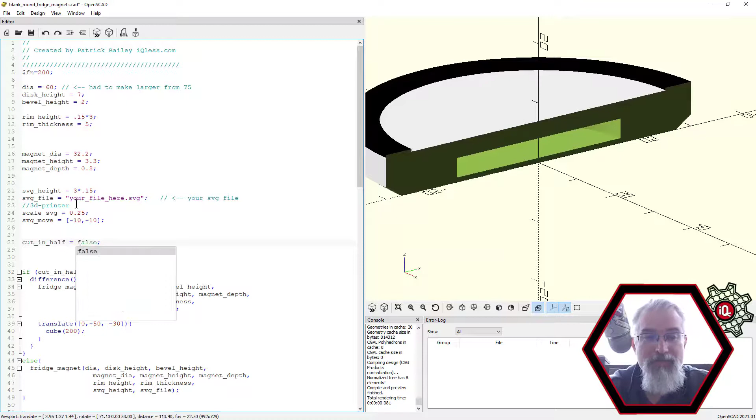There we go. So next thing we want to do is put an SVG file. SVG height, you can leave that because that's the height of this little rim right here. Another thing, you can change that rim. So I have the rim thickness, boom. I'm assuming you're doing 3 layers of 0.15, but if you're doing 0.2, 3 layers, change it to 0.2, rerun it, and it makes it a little thicker. But I'll go back to my 0.15. And also the rim thickness, if you don't want it there, put it at 0, it goes away. If you want it really thin, make it really thin, but I'm going to leave it at 5 for my purposes. And the last thing is all the adjustments for your SVG file.

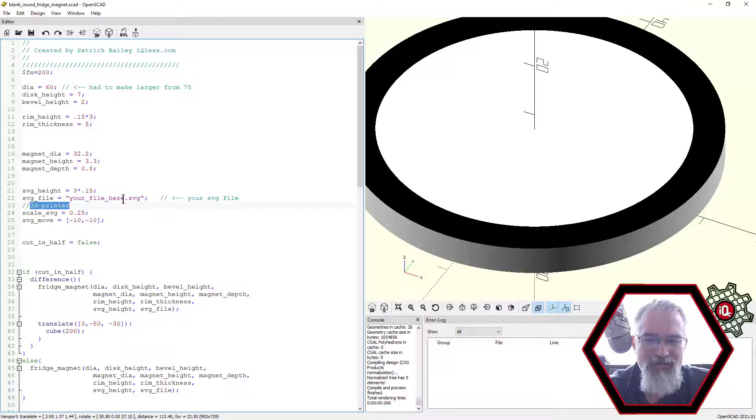So what you want to do is find your SVG file. I'm going to cheat because I copied it here. Right now it says your file SVG, which goes to nothing. But what happens is wherever your SVG file is, it needs to be in the same folder that this file's in.

So we'll go here and change it to that. Hit save. Now one thing here, you may have to zoom out because your SVG file is whatever size it's going to be, and it may not be the right size. So the first thing you have to do is scale it. Here you say I have a scale factor of 0.25. You might need to go smaller, I'll go 0.1 as an example, or bigger, whatever you need to do. So I'll say 0.22.

You got a dog in the background if you can hear that, but the joys of filming outside.

So now the SVG, I have the X and Y. I need to nudge it a little bit. So I'll say -12 in my X. Not quite enough, 15. 16. And I bet I'm going to need the same in the Y.

Well, and look, see, I'm almost there, but I'm probably still a little too big. So I'll say 0.21, and then we'll keep nudging it. So it takes a little while to nudge it right where you want. Ooh, that's pretty close, and let me go down. Boom, there you go. So now there's my file.

That's kind of what I want for this example. I'm going to print this out. Now another thing, even though the colors don't matter, you might want to fiddle with it because you might want to see it a little differently. So if you go down here, you'll see this black, the rim module, it's black.

If I want to make it red, I could just change that black to red. Now it's red. If I scroll down to the import SVG module, it's black. I can change it to red. Doesn't really change the color, but you can kind of see now it looks red.

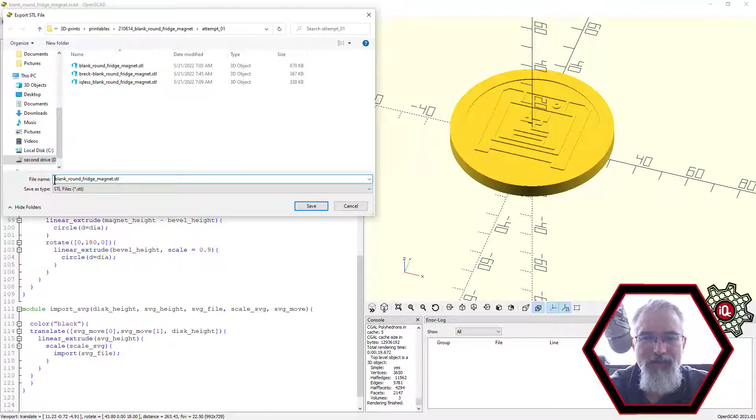Now we'll save it. And where did I save? Let's see, we'll say 3D printed. Boom. Blank. Boom. Okay, now we'll take that guy, and we will go into our slicer. And I will grab it wherever I put it. Let's see, date modified. Where did I put you?

Oh, sorry, I'm being silly. I'm looking for that. There we go. Let's get, there we go. There, I'm being silly. There we go.

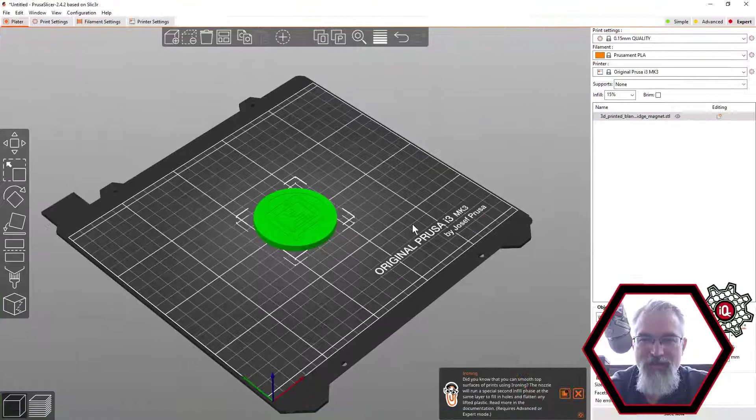Now, a couple things. Let's slice it. And what we need to do, if you're doing 0.15, which I suggest, otherwise you're going to have problems, you want to go down to 4.25. That's the first layer where it covers up the magnet.

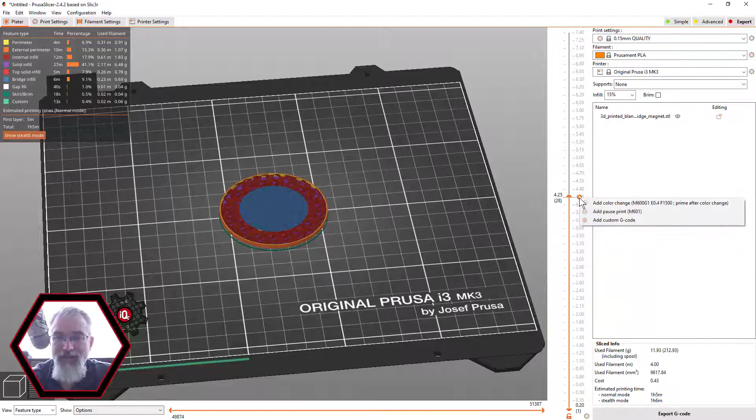Hit that, and you can hit plus there for a change element, or you can right-click it and say add pause, because I really don't want to change the filament. I just want to pause.

And then I can go to the very top, and I can say the top, that's one layer, and I can hit my down button, 2 layers, one more, 3 layers, and then I can hit that, and right-click on that and say edit that color, just for visualization sake, hit black, and there we go.

And then I can go to the filaments up here, click on that, choose white, just for visualization. And there, that's kind of close to what I'm going to be. Hit slice again, so we get all that information in there. Well, I guess it meant to be exported, so let me export it.

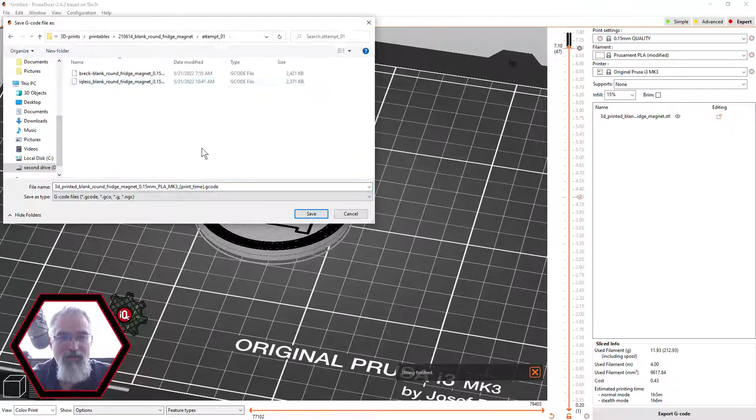Boom, export it. 1 hour, 5 minutes. So let's go see what it actually is, let's go run it and get the actual numbers. But we should be close, about 1 hour to get a magnet.

Okay, this one turned into a real fun one. But before I get into it, here are the magnets I forgot to show, I'll put a link in the show notes. These are the magnets I use, about $24 for 10. They're a little pricey, but very strong, and I think they make a really good result.

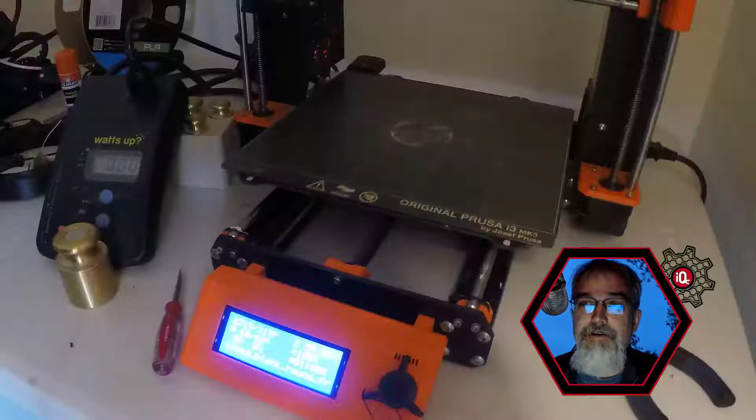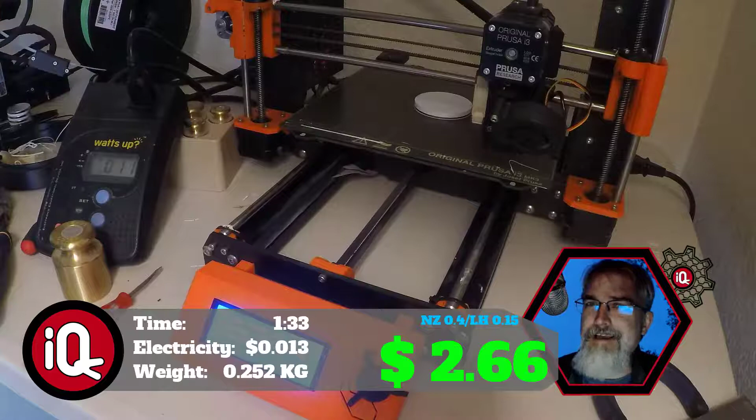Okay, so let's first go over the numbers, then the fun disaster I had. In my case, because I went to dinner, it took 1 hour and 33 minutes to print, but really it's just over an hour. I'm on vacation and forgot to bring my scale, so I'm estimating the cost based on what Prusa Slicer would say. The weight should be about 0.012 kilograms, and at $20 per kilogram that comes to 24 cents. Then you add the magnet, which is $2.40. So all in, I'd say I'm probably within 5%, and the total cost would be $2.66 to print.

But, oh, the joy. This one was a fun one. It should be simple, but in my case I had unforeseen disasters. With my printer, when I tried to change out to the black filament, it decided to throw a hissy fit at me and wouldn't accept it. I was getting jams. So I just have a disc here with nothing on it, and I need to cut this magnet out so I can reuse that magnet again.

But after a few disasters, I got the printer working again with some minor fixes. Those of you who have printers know you have to fix them from time to time—they're kind of like old cars. We're not at the point of being maintenance free, but we're getting there. Let's see if I can show it really well. There's my result, and I think it turned out really well. I'm pretty happy with it.

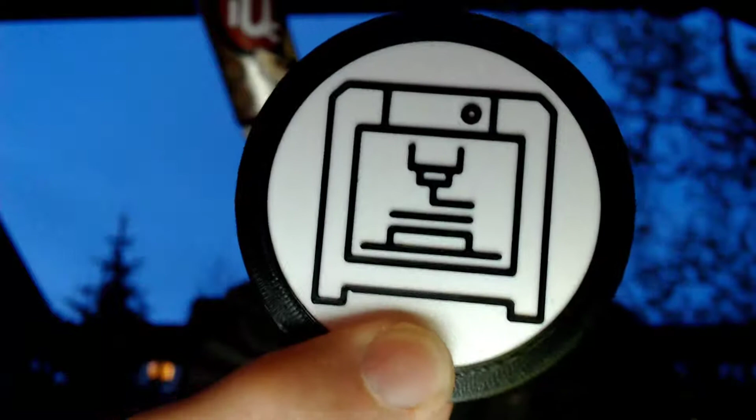My wife's chuckling at me that I made a 3D printed magnet of a 3D printer while on vacation, but there it is. Overall, the point I want to get across is I just want to show how to make this template so people can use it to make their own magnets. I've actually used this template a few times already on my trip, and I'll have to do some other videos on that, showing some memorabilia stuff and also some sneaky stuff, leaving things behind on my trip.

But anyway, that's the basis on how you do this, how to use the template. So go enjoy, and if anyone puts any cool things out there, please link it. Go on Printables and post a make if you make one. There's a lot of cool ideas out there, and all kinds of cool files and SVG files you can find.

Anyway, with that, let's wrap this up with a reminder that 3D printing is an engineering adventure you're on. You can develop your skills and knowledge and take this in so many ways. You can make a business out of this—maybe you sell a bunch of magnets, I don't know. You can teach others, and you can make some amazing designs. So design it, engineer it.

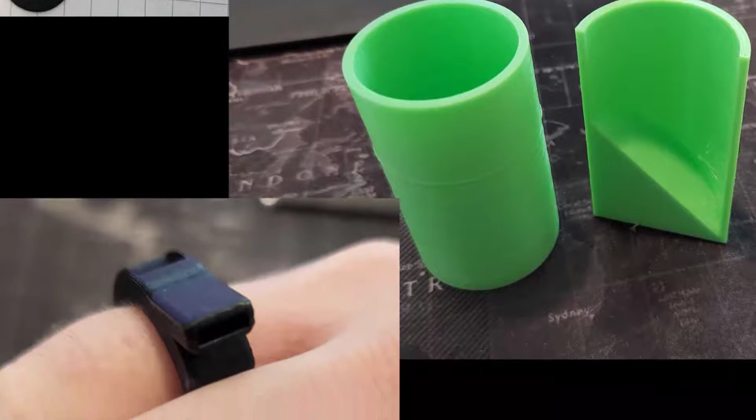I'm working on some 3D printed ideas for Father's Day gifts. I've found a few neat prints on Printables, and I've made a few of my own. The ones I'm coming up with are all fridge magnets. Hey, I think a 3D printed fridge magnet tie for Dad is as useful as it is funny. I hope to get a video out before Father's Day going over some neat Father's Day gift ideas you can print. There are a lot of neat knickknacks and tools out there in Printables I'm sure your father would love. At any rate, keep an eye out for a Father's Day 3D printing video.